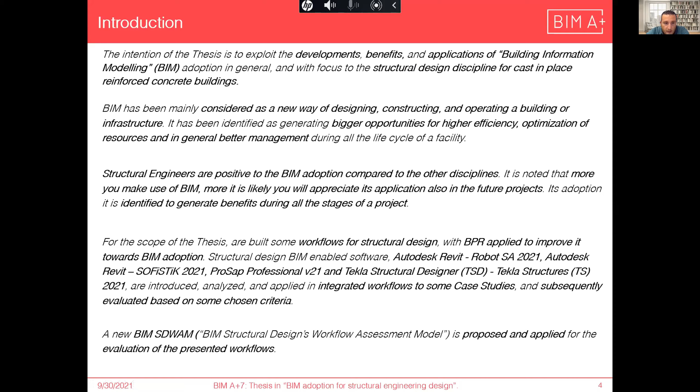In general, it was identified that structural engineers are positive towards BIM adoption compared to other disciplines. So the thesis begins with an introduction to BIM: researching historic BIM and its main developments, then maturity assessment models, challenges, trends, benefits, business strategies, investment in BIM, and integrated workflows.

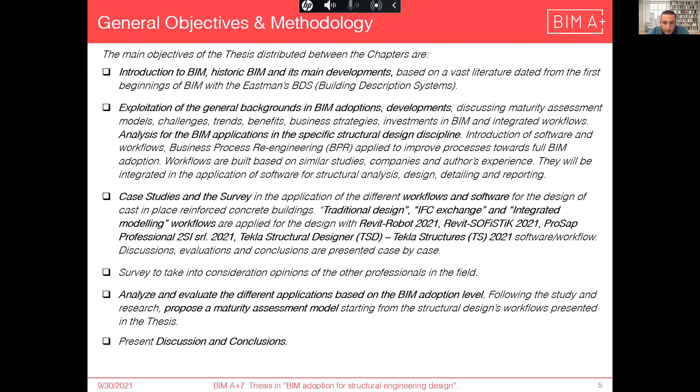Also, three different scenarios have been built, including traditional design, IFC exchange, and integrated modeling workflows, making use of Revit, Robot software, Revit-SOFiSTiK, ProSap, and Tekla Structures. A survey was done to take into consideration the opinions of other professionals in the field, and all information was analyzed and evaluated towards BIM adoption maturity assessment models.

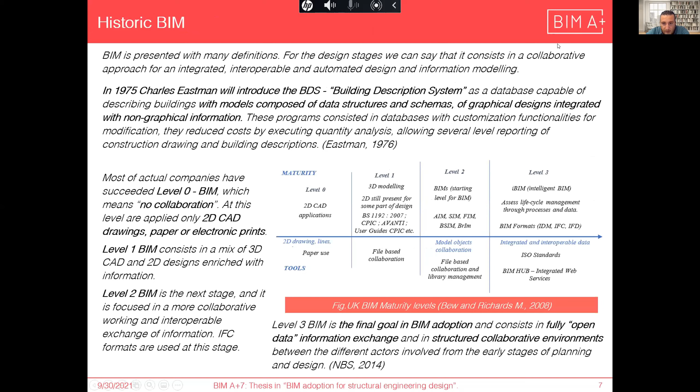We have the general thesis structure. We started with historic BIM by making analysis on the identified research, starting from Charles Eastman with the building description system, composing data structure and schemas, and integration of graphical and non-graphical information. We have the different BIM maturity levels that most of us know well.

Different research has been analyzed for BIM adoption, mainly focused towards project level, organization level, or individual competencies. This is the research from Bryde et al., which evaluated 35 BIM adoptions at project level.

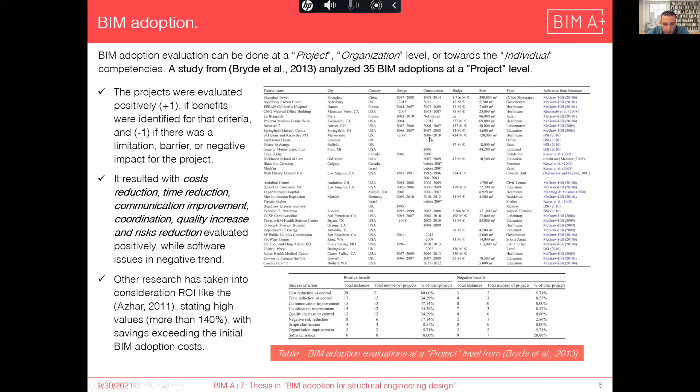They evaluated positively for benefits obtained and negatively if limitations or barriers were identified. In general, it was seen that with BIM we have cost reduction, time reduction, communication improvement, coordination, quality increase, and issues with organization and software.

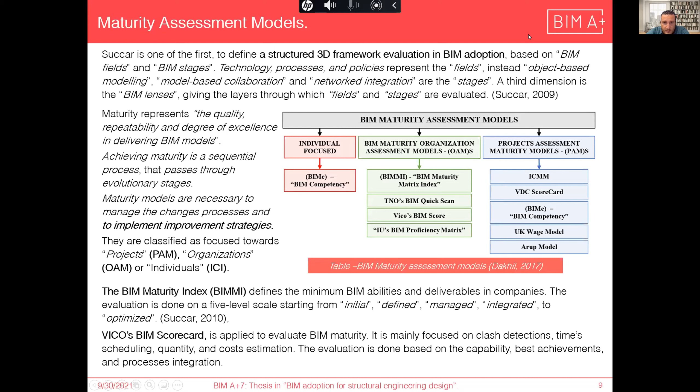Maturity assessment models have been carefully analyzed, starting from individual focus, projects, and organization level. Lack of experience and skilled personnel was identified as a main challenge, which includes people. People are a main challenge in BIM adoption. You need training for professionals involved in BIM.

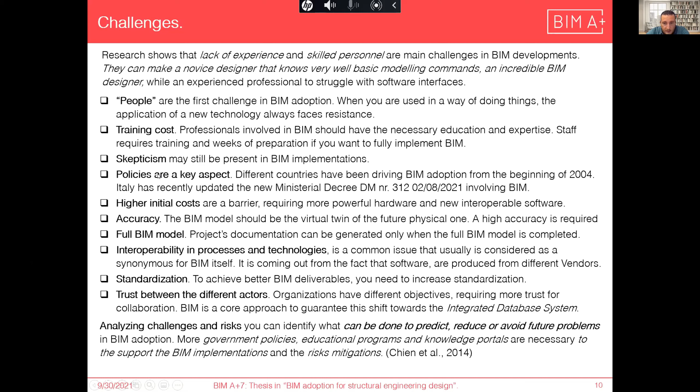Skepticism may still be present. You need policies at the organization level, also national frameworks. You may have higher initial costs, which are expected to be overcome by future benefits. You need higher accuracy of the BIM model, and you need the full BIM model in order to generate the project documentation. You may have challenges in interoperability, standardization, and trust between the different actors.

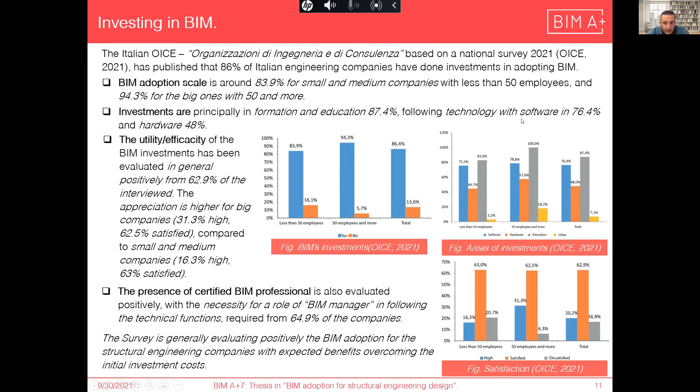Also, the role of BIM professionals was identified and evaluated positively. With BIM we have numerous benefits, starting from reduced rework, accuracy, quantity estimation, higher production, efficacy, higher value, design quality, better communication, and so on.

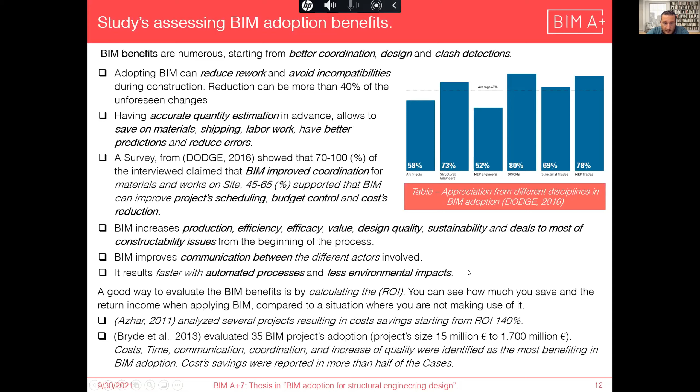Also, from the economical point of view, generally we have the ROI coefficient, which evaluates how much you are benefiting economically and how much you are saving from using BIM compared to the initial cost. Generally, high values have been identified. You need integrated workflows, connected processes and activities, in order to have BIM adoption.

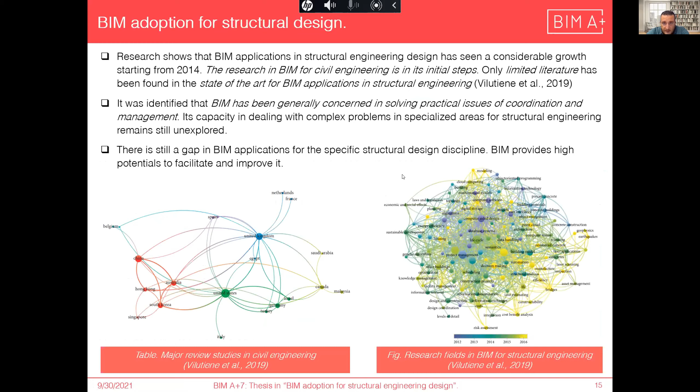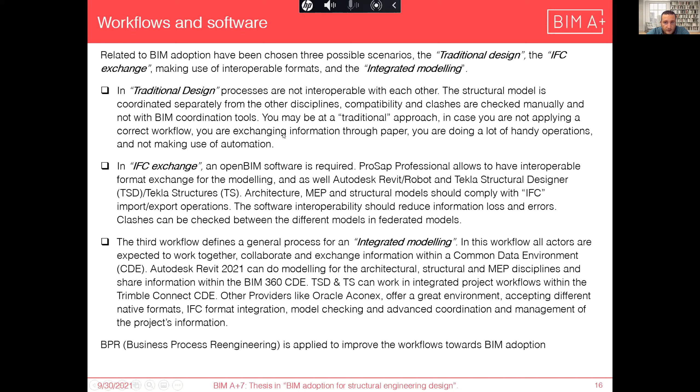For structural engineering design specifically, it has generally been identified that there is a lack of research, and BIM research has mainly focused on coordination and management. For this thesis, we built three scenarios, starting from traditional design, where you have no specific digital collaboration, then IFC exchange, which makes use of interoperable format exchange, and integrated modeling using a common data environment, CDE.

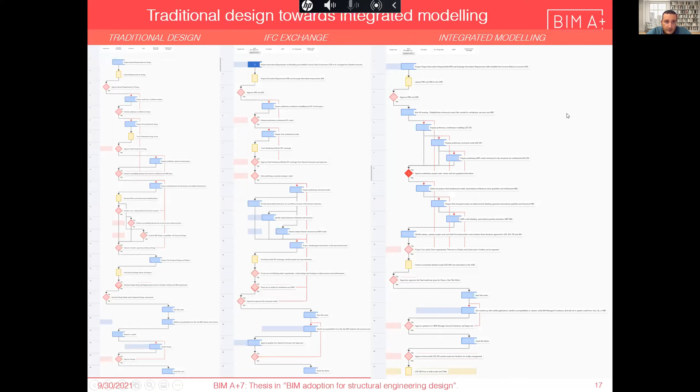The workflows and scenarios have been further detailed for traditional design, applying business process re-engineering (BPR) to IFC exchange and integrated modeling, specifying all the duties and responsibilities for all the actors involved in the process.

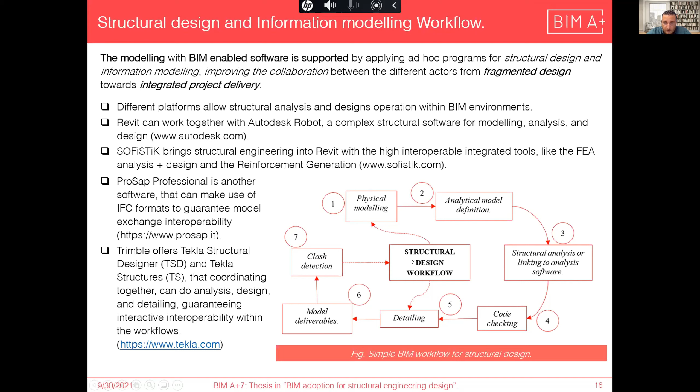When you start speaking of BIM, you are going from structure design to information modeling workflows. So we have physical modeling and analytical model definition, and the particularity of the structure model, which consists of structural analysis, code checking, detailing, model deliverables, clash detection, and so on.

We have different software integrated in workflows, starting from Revit-Robot, which makes use of add-in tools and commands for information exchange by mapping the different structural elements, and also allows information exchange not only for models but also for loads, for design, and for results, including reinforcement detailing. We also have Revit-SOFiSTiK.

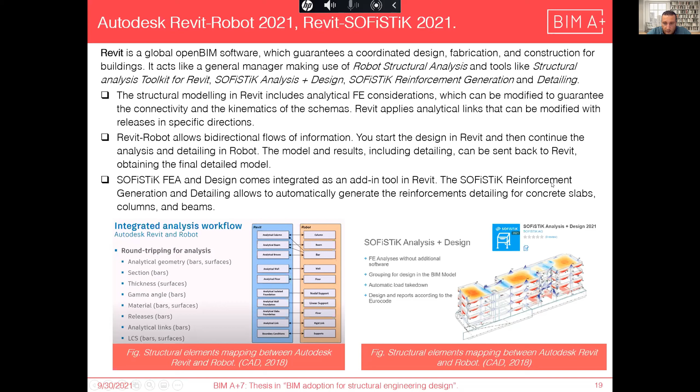SOFiSTiK comes as an add-in tool and allows direct information exchange within the software. It has been used in Italian software. We have ProSAP, which I think is in the first steps of BIM adoption. It makes use of import, update, export operations for IFC formats and some additional tools for increasing BIM interoperability.

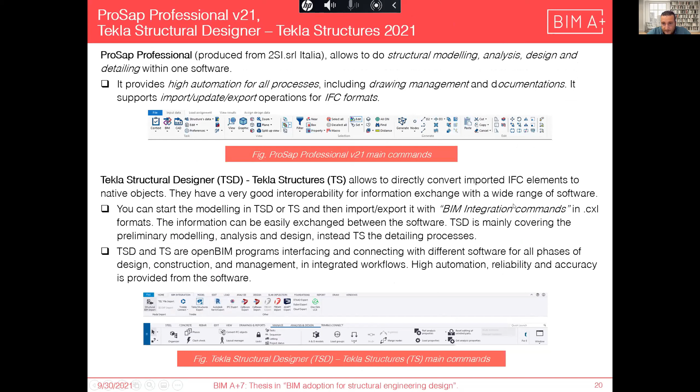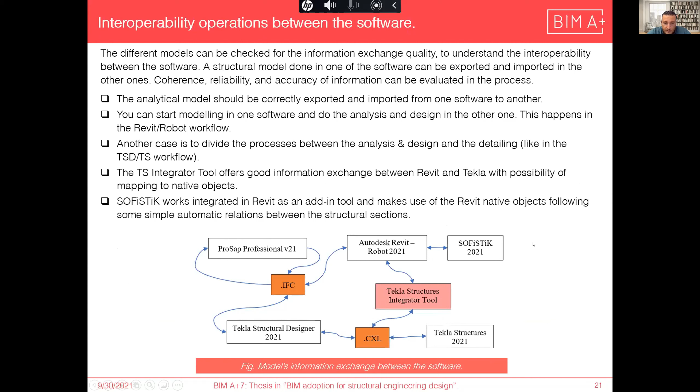Then we have Tekla Structural Designer, Tekla Structures, which has been identified as very good in all operations and processes for design and information exchange. Interoperability has been analyzed making use of IFC models and the CXL formats, which increase the interoperability and are being used mainly from Tekla and Revit.

All these scenarios and integrated workflows have been applied to specific case studies. The first one was an academic model which we built during the BIM program. Then we have 3 case studies, which mainly compose case study number 2. The first one makes use of traditional workflows, the second one is IFC exchange, and the third one is integrated modeling.

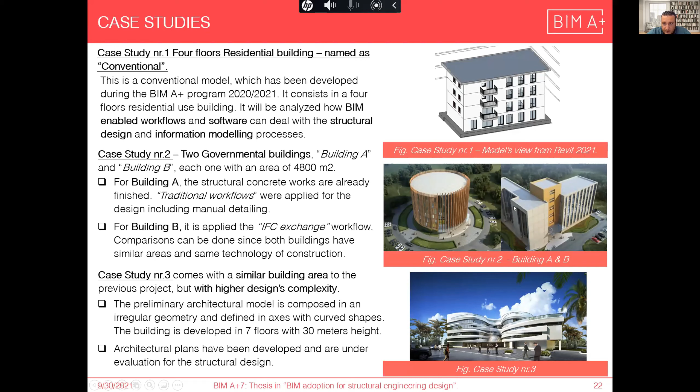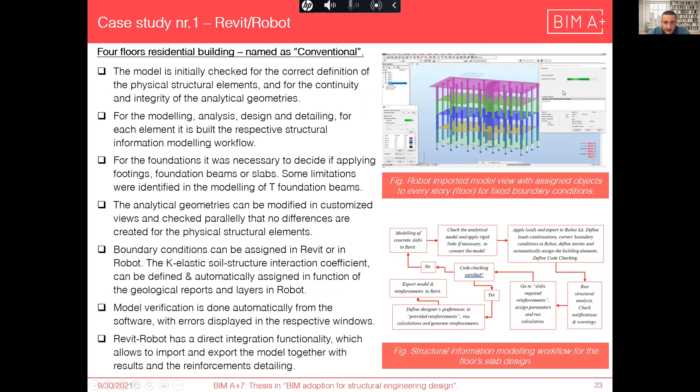These are real case studies, and they've been analyzed for the process involving structural design and information modeling. For all design of structural elements, specific workflows have been built with all the analysis, design, and detailing reported in the thesis, so we have advantages and disadvantages for each one of the specific software and workflows.

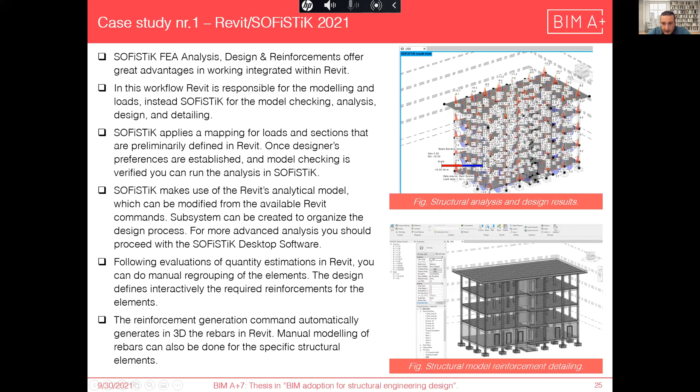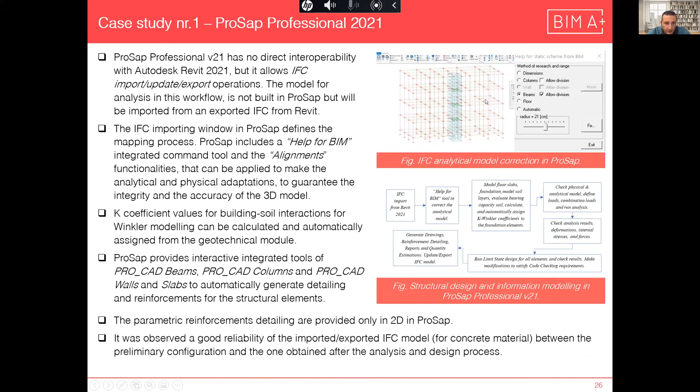For example, Revit, Robot, and SOFiSTiK make use and allow direct 3D reinforcement detailing in Revit. ProSAP makes use of IFC information exchange and applies some additional add-in tools. It does not include 3D reinforcement detailing, but mainly 2D information and detailing for the reinforcement.

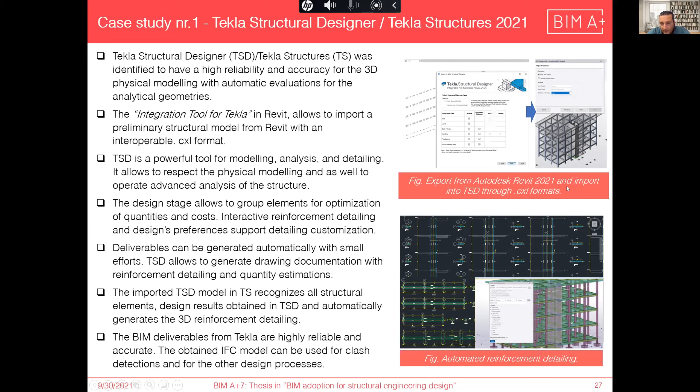In Tekla Structural Designer, Tekla Structures, we analyzed all the analysis, design, and detailing process. Mainly Tekla Structural Designer is for analysis and design, and then we have the detailing and reporting from Tekla Structures, which directly recognizes all the information from Tekla TSD and automatically generates the 3D reinforcement detailing.

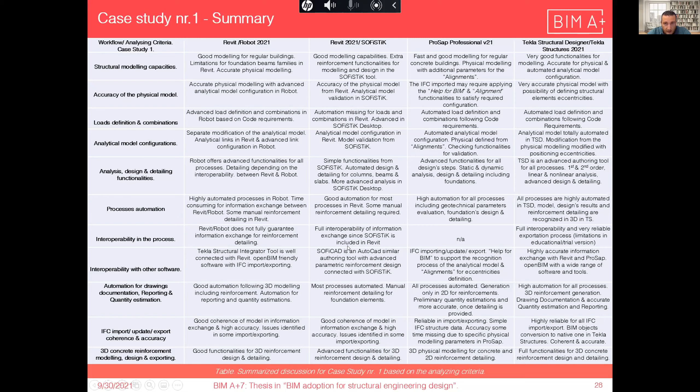All these case studies have been analyzed using chosen analyzing criteria: structure modeling capacities, accuracy of physical model, loads definition and combinations, analytical model configuration, analysis design, detailing functionalities, process automation, interoperability, and so on for each one of the processes involving structural design and information modeling.

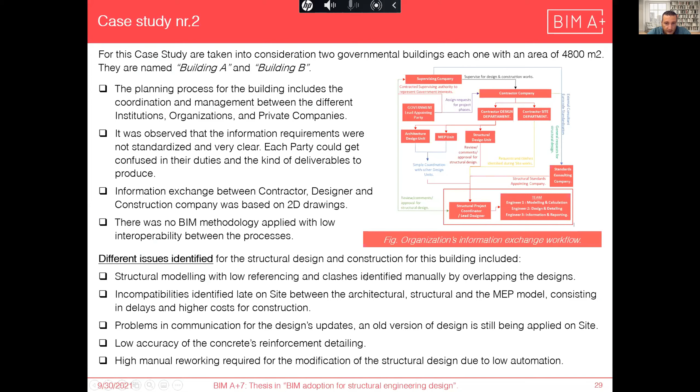Case study number 2 was also analyzed in detail at an organization level for information exchange. Here, an already built building initially had the traditional workflow applied, so it was possible to compare the improvements obtained in the structure in case study number 2B, which was improved for IFC exchange.

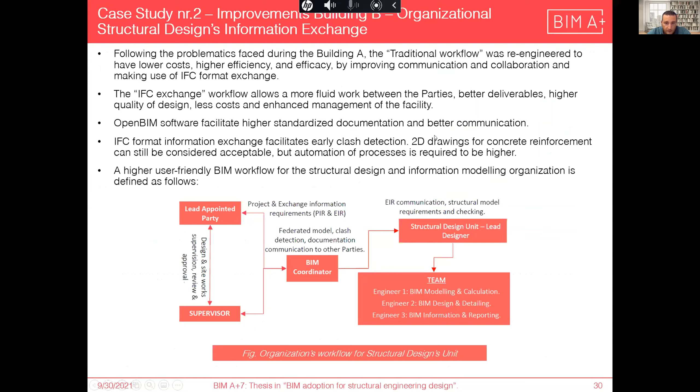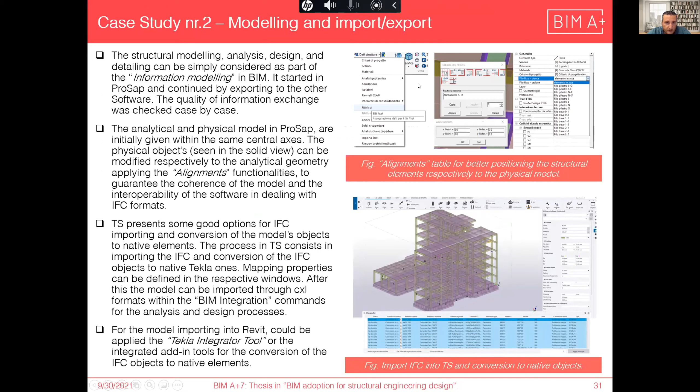This was for workflow and formats, with the introduction of the BIM coordinator profession. This case study was also analyzed for all the processes involved in modeling, import, export, for analysis and design process, and for automation within all the software and integrated workflows.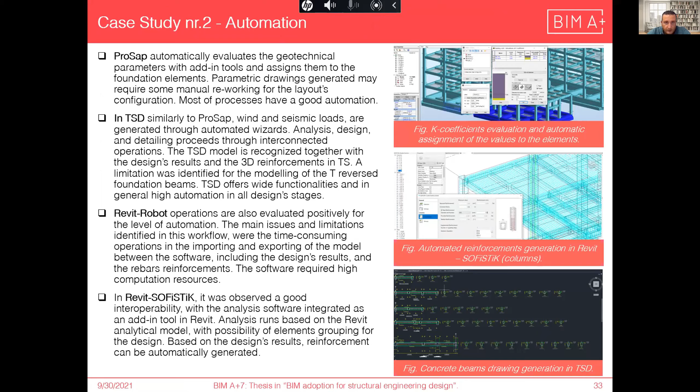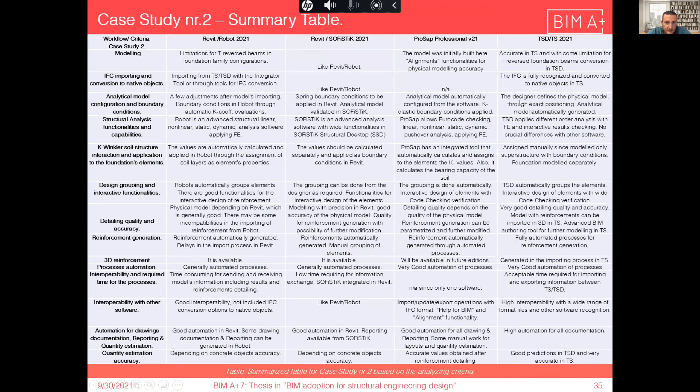In this case study, we identified and analyzed, for the chosen criteria, every specific workflow for its advantages and disadvantages that they were introducing in the process. It was also possible to make a comparison.

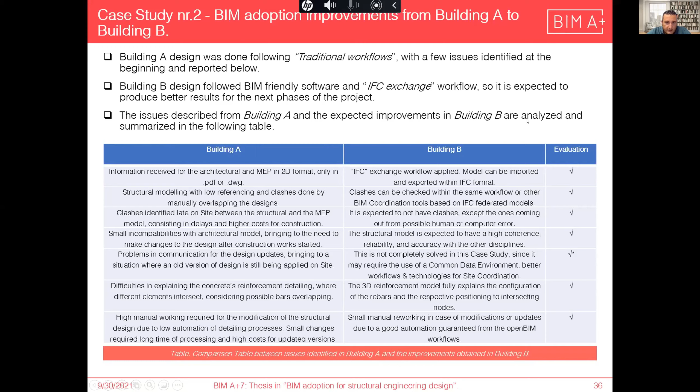For example, in building A, which used traditional design, there were clashes identified late on site between the different design disciplines. Instead, with building B, it's expected to not have clashes since it makes use of IFC exchange for clash detection between the different discipline models.

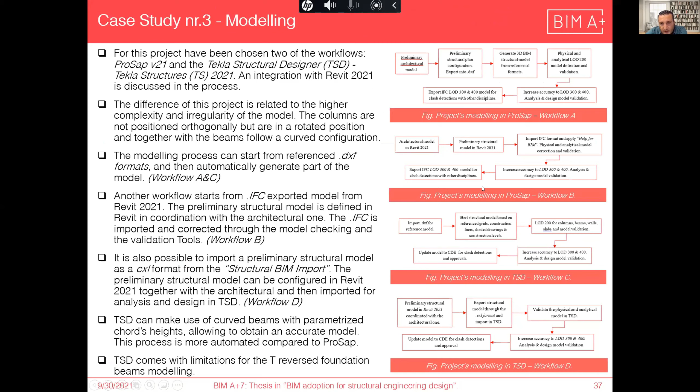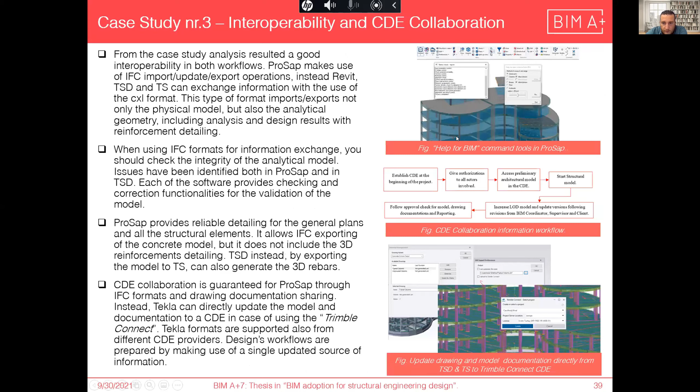Case study number 3: here we built detailed workflows for every specific modeling process, also for analysis, design, and detailing. This case study had a higher project complexity, and it was defined that generally all software deal well with it, mainly Tekla, with some limitation in ProSAP.

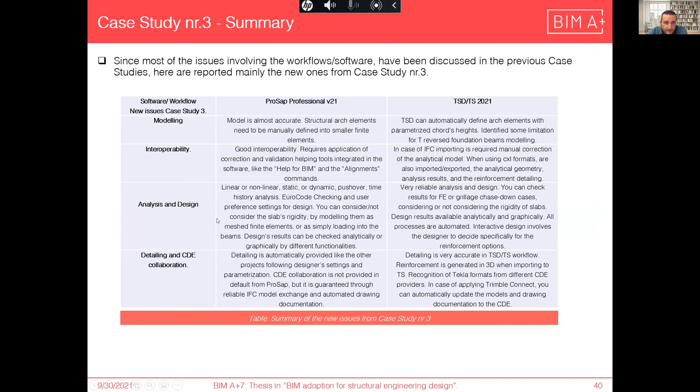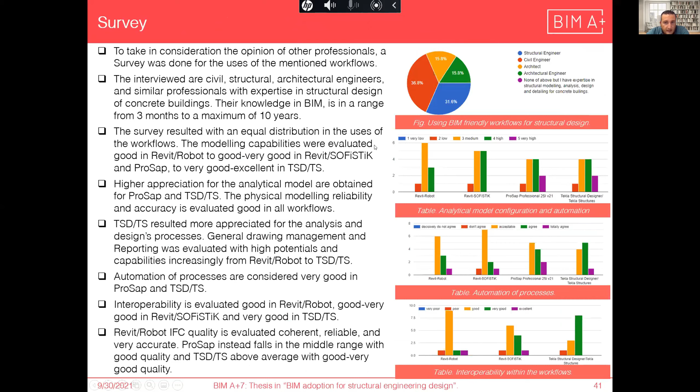Also here we reported all the new issues for modeling, interoperability, analysis, design, and detailing. A survey was also done for all the processes involved in structure design, for different professions, in order to have opinions from other people working in the field.

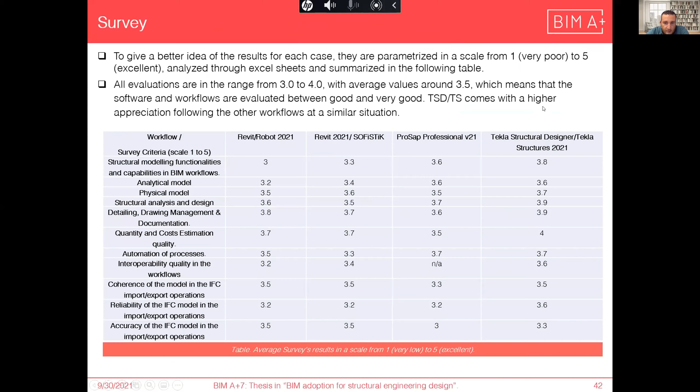The results have been parameterized to give a better idea of the evaluation. So at the end of the study, we introduced a new BIM SDWAM model, the BIM Structure design workflow assessment model. Generally, maturity assessment models are oriented toward project, organization, or individual competencies, but here we are going into a specific discipline.

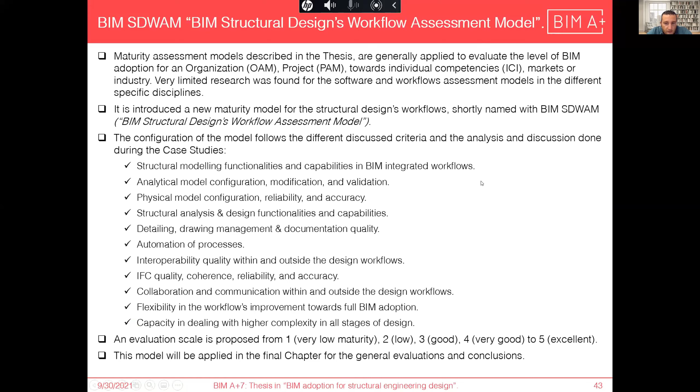So we have the BIM Structure design workflow assessment model for the specific structure design discipline, applied to all the analyzed and discussed criteria during the case studies. In conclusion, all the issues identified during the case studies have been summarized into a final table, including the application of the BIM SDWAM workflow and maturity assessment model for each evaluation criteria, with the specific result for every integrated workflow.